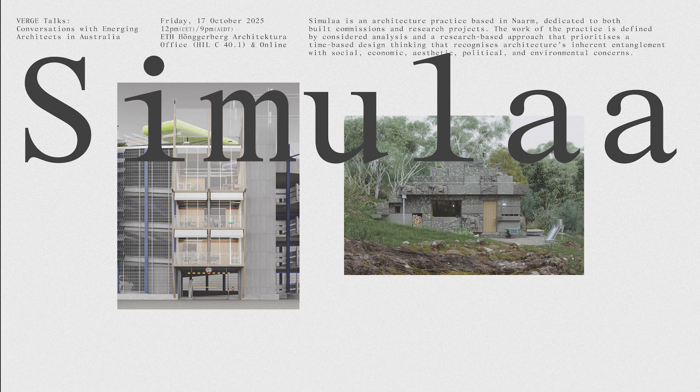It's highlighting emerging architects in Australia, and the conversations around that. This talk is focused on the development of Australian architecture, and these open forums bring to light good design in Australia with these emerging architects.

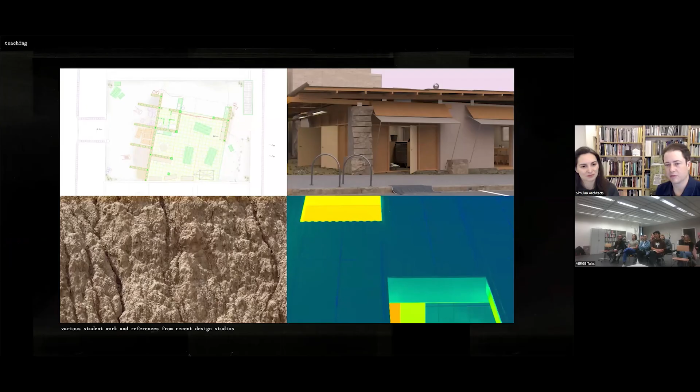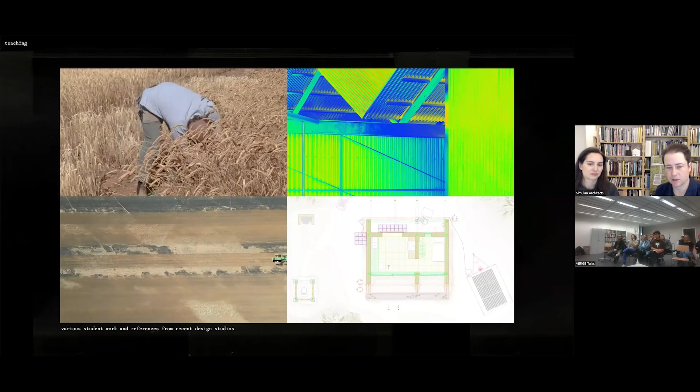The other important aspect to our practice is our academic roles. We split our time 50-50 — Anna at RMIT, me at Melbourne University. There's a particular focus in the studios we run that's energy related, also working a lot with the agricultural campus at the University of Melbourne, looking at growing materials, bio-based materials, and that sort of thing. So that's always an important part of the way we work and practice.

We're still obviously trying to reckon with a very dark colonial past alongside a long, proud Indigenous history. Just for context, the name Melbourne was named after a former British Prime Minister of England who never visited Australia, by the then Queen of England, who also never visited Australia. So it doesn't feel like an appropriate name.

We're going to talk about a particular architect, Michael Markham, through a couple of his different modes — Field Consultants in the 90s with Peter Brew, and then the Urban Green Tug Workshop. I'd say he's not even a very well-known architect, shamefully for us, in Australia or even Melbourne, but one we think is incredibly exceptional and has had a big impact on our practice. There's a lot to talk about with his work.

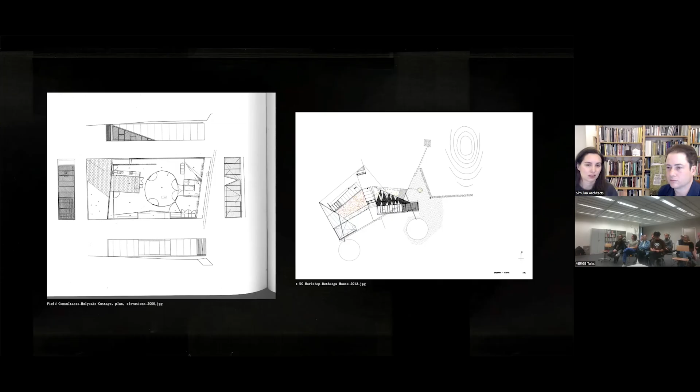These are the plans of two of his office's projects that we see as bookends: the Holyoke Cottage, his own house, completed in 2000, and the Bethanga House, completed in 2012. Michael describes these as representative of two styles, distinguishing the two offices he's had: field consultants with Peter Brew, which ended in 2003, and Tug Workshop, his current office, where he collaborates a lot with engineer Tim Hall.

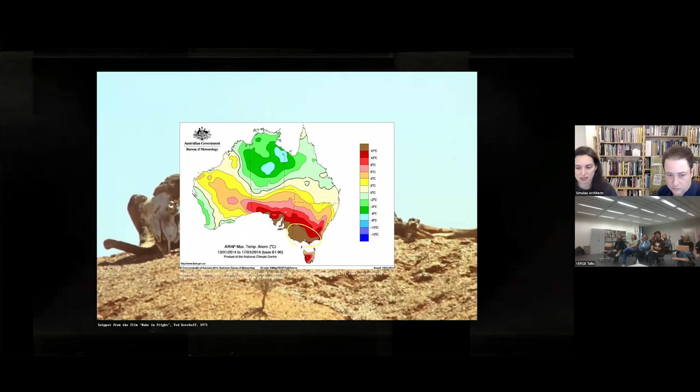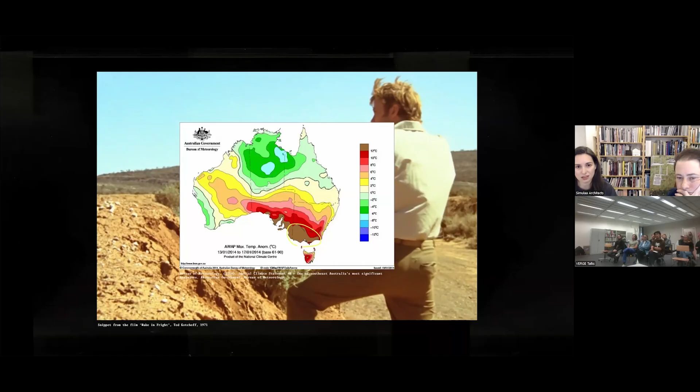It's that condition, that particular part of our context, that Michael responds to through his work and in this project we're going to talk about. It reflects the fact that you just can't design the same way in our part of Australia as you can to the north.

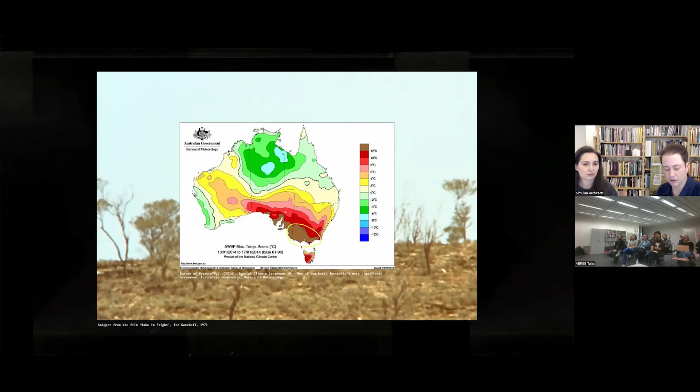It is pretty unusual to have the very hot and the very cold all in one day. Which brings us to a very particular part of Michael's research, through his research into spacesuits and space shuttles, likening the extremes of space exploration to the conditions of our part of the continent.

This research into the spacesuit and the space shuttle, having to contend with those same extreme conditions moving in and out of atmospheres from extreme heat to extreme cold, does inform his work a lot. I think it's affected both styles in different ways. The first style was very much about lightweight, cheap, available materials, and in the second, more the spacesuit, a highly conditioned space that's locked off from the outside world.

This is a very small project, a house, a cottage on a very small inner suburban lot, which was awarded the highest honour, the Victorian Architecture Medal, as well as the Harold Desbrowe-Annear Award for residential architecture in 2000. He describes the cottage as a modern cottage in an area of 19th century cottages, a rethinking of the small lot house, contesting and inverting the archetypal colonial cottage.

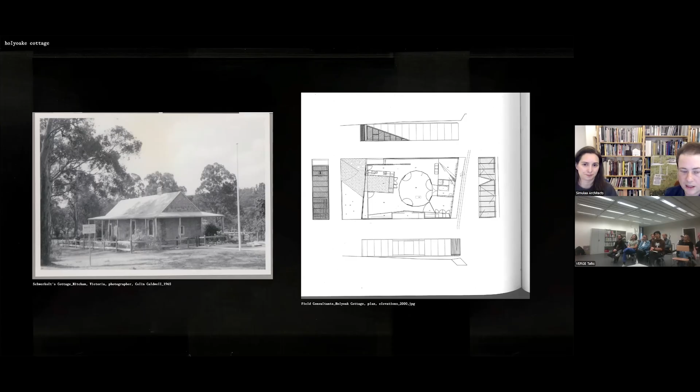Pictured here on the left, a homestead that sits central on the lot with a front and a back, a perimeter veranda shading the building's facade and directing views outwards to the landscape, surrounded by a garden and bounded by a fence. We'll take you through this project and uncover some of those qualities, and how it's a deliberate inversion of that colonial cottage.

The cottage itself is dominated by a circular internal courtyard, open to the elements, containing a sole mulberry tree. This courtyard is the lung of the home, breathing air, sunshine, and space into the heart of the house. From here, both energy and life filter and disperse to the extremities of the interior. Spatially, the courtyard is perceived as integral to the open planning, where the absence of a roof creates a horizontal window.

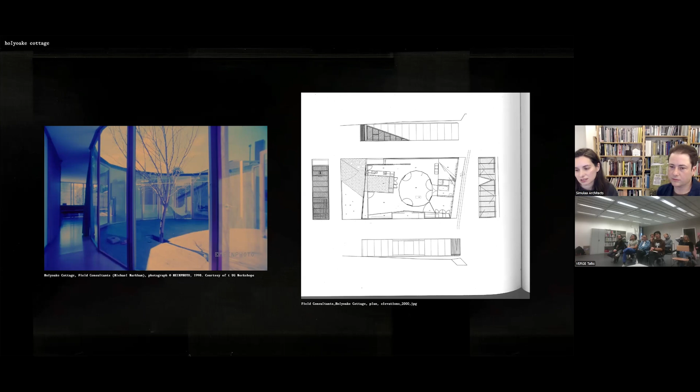And maybe just to go back, as the architect describes, it doesn't have 3 bedrooms, it doesn't have a bathroom for every bedroom. The garden is in it, not around it, as Andre's just described, and there are a few other qualities we'll talk about.

It sits in a bit of a lineage, with a couple of formative precedents. Certainly one on the left, which many people locally will know, the Grounds House by the architect Sir Roy Grounds. This was his own house, which also won the Victorian Architecture Medal in 1954, 46 years earlier. However, the courtyard in the Holyoake Cottage is not this sort of pure geometry as shown in Grounds' plan. It's irregular, off axis, giving way to other episodic forces in the plan. So perhaps it instead echoes Villa Snellman.

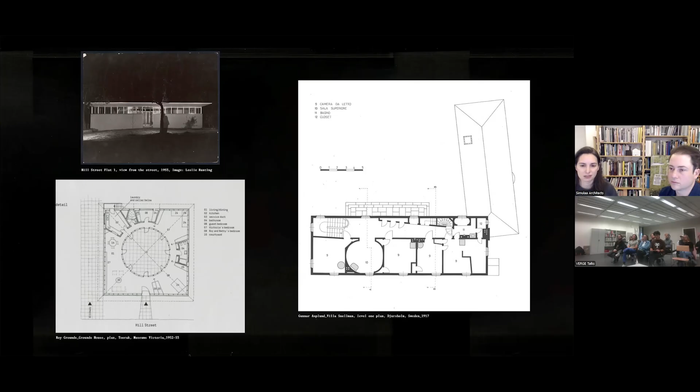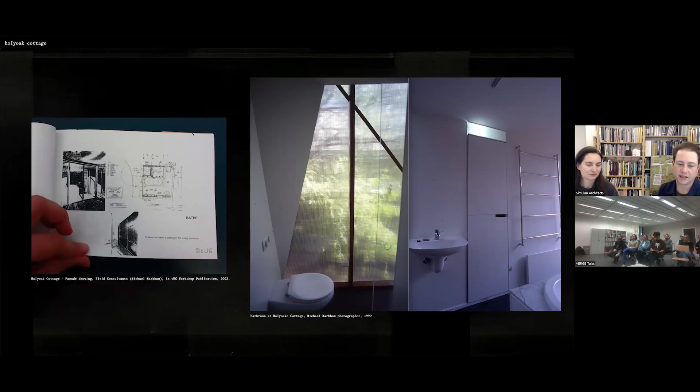Another particular thing to this house—we actually ran an exhibition in the gallery in front of our office, featuring 3 houses from the 1990s, all distinguished by having one common trait: one bathroom. That might sound fairly typical to most of you in Europe, but it's fairly unusual here, sadly, where often every bedroom has a bathroom attached to it. So quite distinctively, this project is decidedly one bathroom for a whole family.

One bathroom. The other thing is the non-static nature of the plan—there's a looseness, a lesser amount of fixed walls, and the space can be transfigured through the small manipulation of a door or a sliding door to create a new sort of partition.

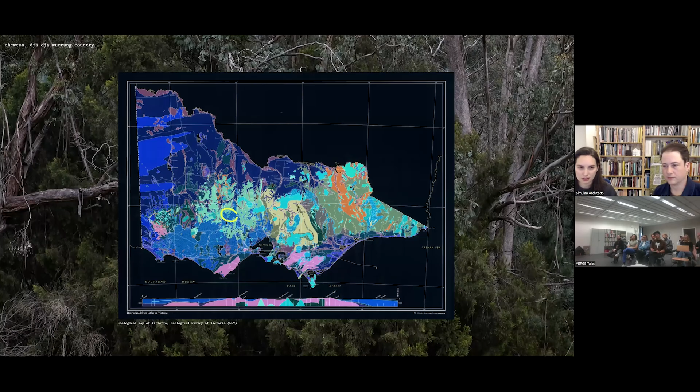By the 1880s, it had expanded to include a large crushing battery powered by a water wheel, one of the biggest of its kind in Australia. Operations then dwindled in the 1900s when the wheel ceased running and the site was thereafter abandoned.

This was a very particular condition to Australia, where we dig things up and then we sell them for the most part, and the sort of, at times, ecological devastation that can ensue.

It's sometimes hard to think that a landscape can recover from this type of upheaval. But in the space of 120 years, the eroded gullies, tailings, and exposed rocks left by the mining have slowly been covered over under the natural regrowth of plant life, regenerated grasses and these woodlands, which you see here.

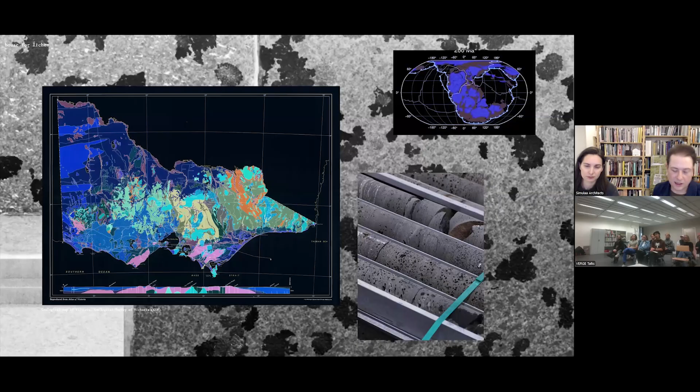That area, these plains, produced the magnesium and iron-rich soils which our agricultural industry now relies on. So it's interesting to think about the layers of time this region has uncovered. That set up the foundation of the project. We saw the house itself as a sort of rudimentary bothy, recalling proto-architectural forms like dolmens, megalithic structures built primarily as tombs or burial chambers, dating back to the Neolithic period.

Or a bluestone cottage, perhaps. But lichen grow at a glacial pace. They typically grow 0.1 to 15 millimeters per year, depending on environmental conditions. Over long periods, think 50 to over 1,000 years, they can visibly etch and pit rock surfaces through a combination of physical and chemical processes. This gradual breakdown contributes to the first stage of soil formation and this process of ecological succession and renewal.

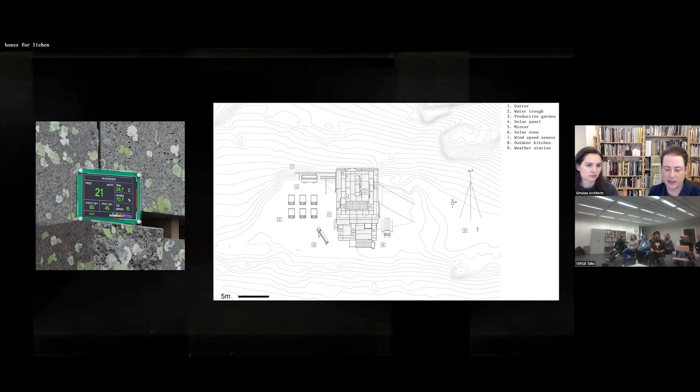So we developed a narrative around how we could facilitate the lichen, set up on the structure as an environmental sensor that logs temperature, pollution, humidity, and air quality to monitor conditions relative to lichen growth. This is connected to a mister, since moisture is a very important aspect for the lichen to be cultivated.

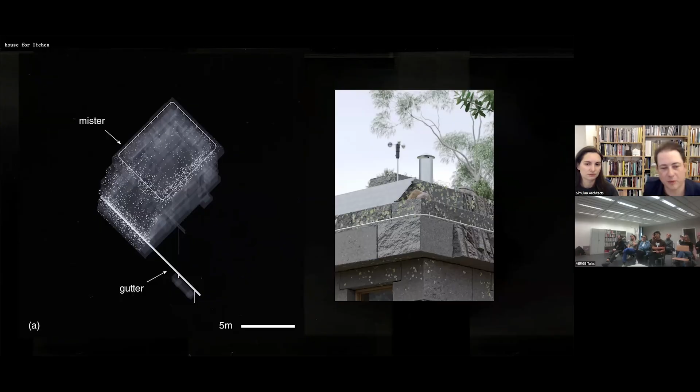The house itself becomes symbolic of this deep time view, where lichen growth registers environmental history, accumulation over seasons and decades, the evolution of the structure as it were. Over centuries, they perform the quiet geological work of breakdown and renewal, and through deep time the structure is proposed to gradually be reclaimed and folded back into the landscape which it once observed.

Yeah, so we're getting close to realizing that one. So the next little project we're going to talk about is an exhibition we completed earlier in the year called Deep Time, Real Time, which also includes an installation strategy.

The exhibition was supported by the Alastair Swayn Foundation, which Lucas mentioned. We co-curated the exhibition with Fleur Watson, and completed the exhibition design itself and contributed to this installation. So we might talk about the architecture a bit more in this work, rather than the broader concepts, but there is another lecture elsewhere where we deep dive into that if you're interested, so we'll skim over it. We're also mindful there's 10 minutes left, we're running out of time.

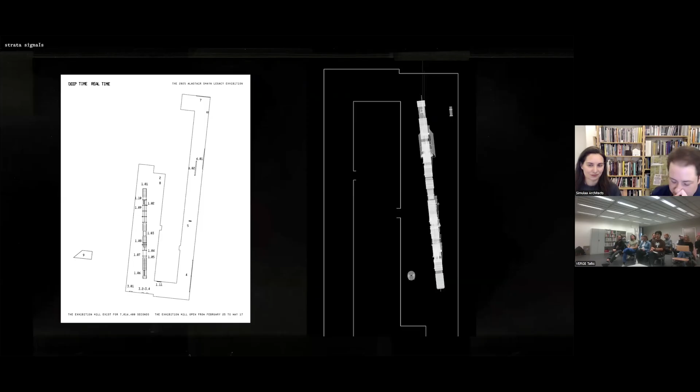Some of the works here: this is the work of Nick Mangan on the left and Fazan Lotfijam on the right, so it sits between these temporal timescales of real time and deep time. Again, if you want to know more, there's the deep reveal on YouTube. This is Strata Signals, which is essentially a geological timeline, along with other research and interactive works.

And it was housing a lot of geological core samples, which are all collected and collated. I think it's now close to a 200-year-old repository of geological samples that the Geological Survey of Victoria hold. Here you can see part of their very vast warehouse that catalogues everything. It's obviously like a scientific hub.

Whilst it's primarily used for prospecting, geological surveying for commercial exploration, there's a whole scientific field that engages with this as well. The idea of representing Victoria's geomorphology in this timeline was the kind of brief that we went to them with. And the geologists there, who called themselves the rock librarians, were super keen to put the most intriguing formations of geology on show in the exhibition.

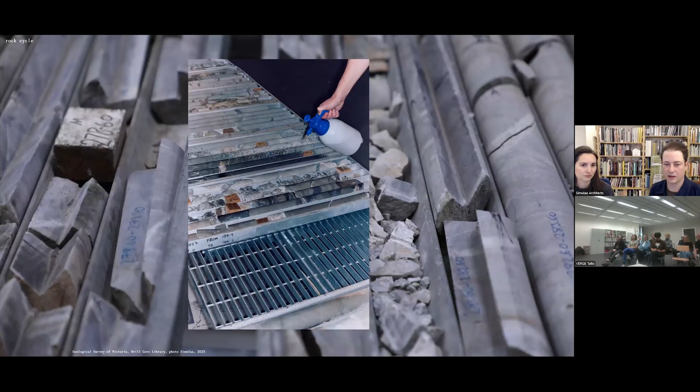So a really important part was the olfactory experience. You could literally spray and touch these drill cores, and smell that - I think there's a word for it - petrichor, this really distinct smell. It's like what you smell when it rains and you're walking the street. It's meant to be something that's really ingrained in us, in our DNA, but no one quite knows how that sense works with rocks. It was about immersion and interactivity.

It's sort of this kind of armature that's also housing and representing a lot of other disciplinary fields that explore these same conditions, but through different technological means or different temporal scales, and it layers up the structure - it's a sort of strata.

And the billboards at the top, you can see recent aerial imagery - that drone footage that we took of the sites where these drill cores were taken from - so you could see the transformation of that land over that amount of time.

Along the wall as well was a timeline tying together all the different works in their relative timescales, codifying in the same manner that the Geological Survey would, logging all the data - telling you where the rocks are coming from, not only the date of that geology, but also the date that they've been excavated, etc.

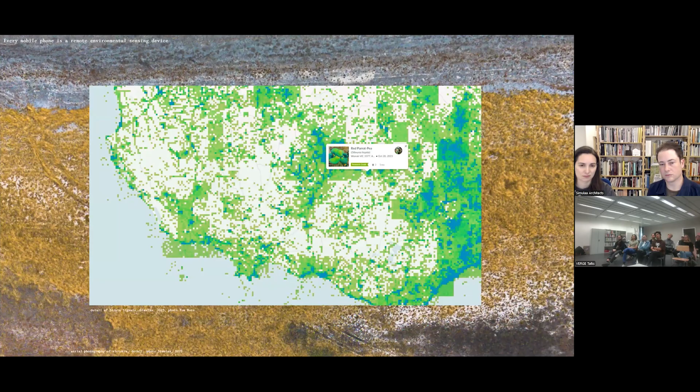And then other video works. So we made a documentary of the work of the Palynology, Paleoecology and Biogeography Research Lab, and had other representations of, in this instance, the iNaturalist database, particularly across the state of Victoria and other parts of Australia, where citizen scientists are contributing live in real time to this database that everyone can start to catalogue.

Hyperspectral imagery - this is from the Hypersense lab that we work with at University of Melbourne again. This is about recasting technology that had sort of nefarious origins in the service of ecological good. In this case, the hyperspectral imagery is able to reveal soil health, soil condition, vegetation, and land practices.

And then, much like House for Lichen, there's an environmental sensor monitoring the gallery's environment in real time and feeding back. There was a series of screens displaying the data being captured within the installation to monitor different levels of carbon dioxide, other pollution, and temperature.

This is pretty much to say there is this kind of rock cycle, this constantly moving system which, to us, seems quite static, unless of course you're in an earthquake-prone region. There's very little that has us in tune with these kind of cyclical systems. We often describe this through the words of geologist Marcia Bjornerud, who describes the Earth as this closed-loop regenerative system, constantly reforging and restocking over 4.5 billion years. It's pretty vast and hard to fathom, really.

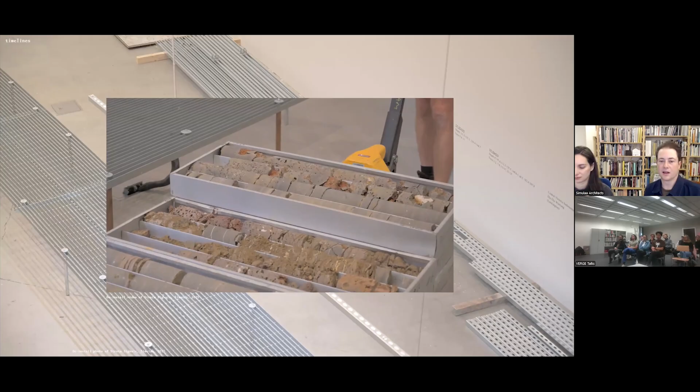So then, as Anna said, more broadly, the design of the exhibition itself is all around a way to clip, bolt, strap together, and to be able to deconstruct it and also hack the structure itself. So it was changed and adapted as it was needed.

We ran probably too many events and programs across the duration of the exhibition, which was exhausting. But then the structure had to facilitate different things at different times, which was fun as well.

And the panels you see are all these compressed hemp board panels, which sadly the manufacturers are not making anymore. I'm sure someone else will, but the idea is that all the parts which can't be used can just be decomposed as well.

So we'll fly through this last one, but this is obviously just something a little closer to Basel, which is the competition that we were unsuccessful in.

So I think from the outset, we came in not knowing a great deal about the context of this situation. And we certainly weren't familiar with that catastrophic event at Schweizerhalle, the fire that happened in 1986.

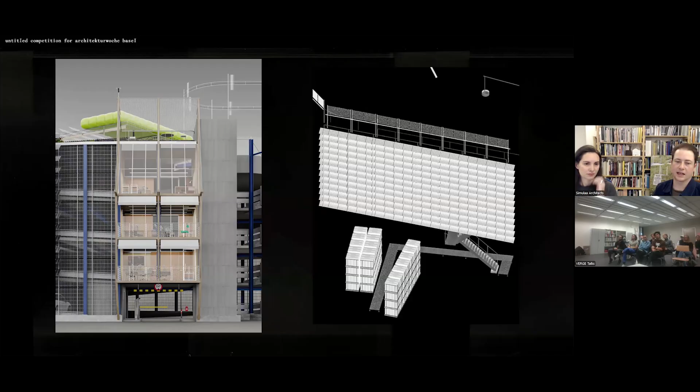Yeah, so this is like PFAS materials, forever chemicals, microplastics, runoff pollutants from cars. And so the idea was to transform this car park in the service of studying, recording, mapping and sensing minor toxicity. A kind of living laboratory.

And in late 2023, as part of the Notes from a Finite World research project that we received that grant for, which Lucas mentioned also, we were visiting a lot of sites and projects which really presented new paradigms for architecture, we felt, and the Hamburg Energy Bunker was one of those.

And so we kind of started to rethink this car park through that same lens, this recasting of an existing structure. So it became this kind of systems diagram, which we often start with, just about the interrelational qualities between the different components. There's a series of different interventions which either have forms of exchange of energy, water, filtration, or monitoring. We'll just quickly fly through a couple of examples.

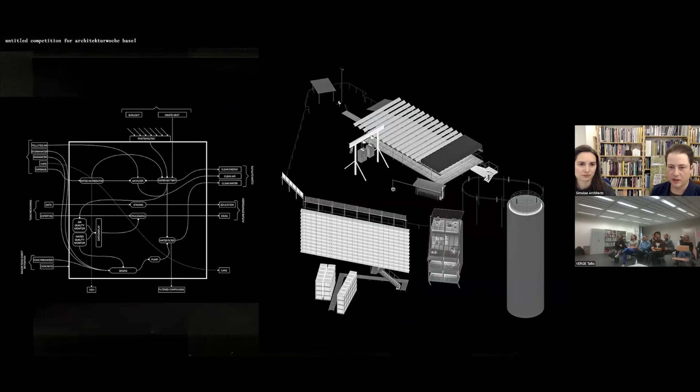In this instance, it's a setup between a gravity battery and a solar array. The gravity battery is able to lift—in this instance we had large basalt boulders—heavy stone when there's a surplus of energy, and then once the sun goes down, the heavy weight slowly drops and spins a generator, so that allows you to get electricity at night as well.

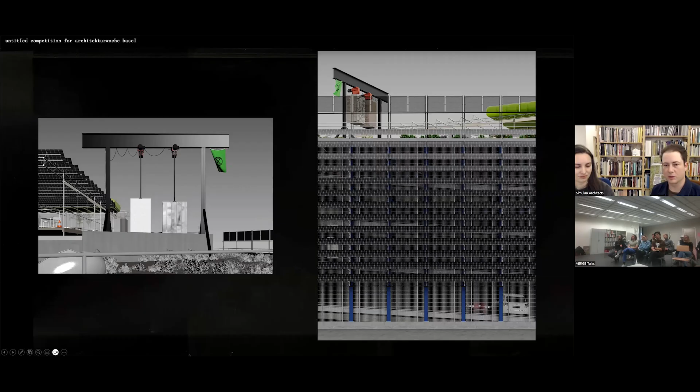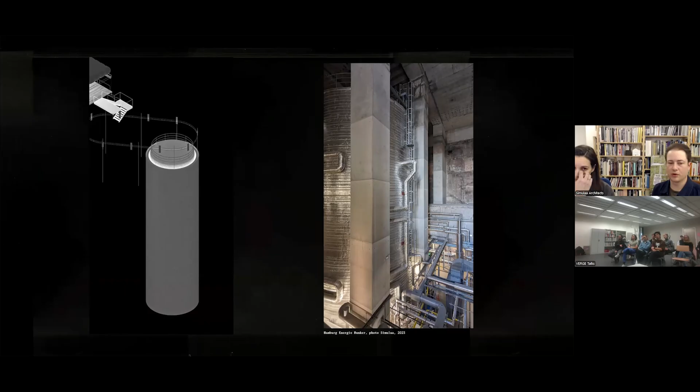In much the same way as the Hamburg Energy Bunker has a sort of water battery—a big water tank that's heated and that energy retained—we were proposing to use the existing silo on the car park as well. The basement took a series of smaller scale water batteries, which more directly translate into electricity. And also looking at the roof as a way to plant and have natural filtration of water and toxicity from water runoffs and rain.

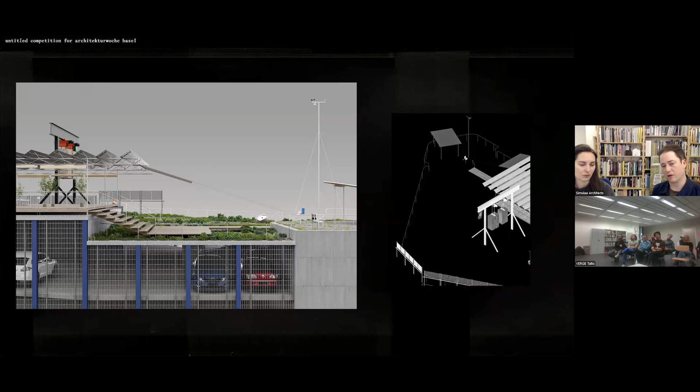And then a sort of new armature that sits on the outside, meant to be a small office dedicated to this work, as a way to help facilitate exchange, information sessions, and the monitoring itself as a practice. Because I think that idea of the living lab is also in service of regeneration, repair, care, but also engaging the public. So that's kind of how we saw this one.